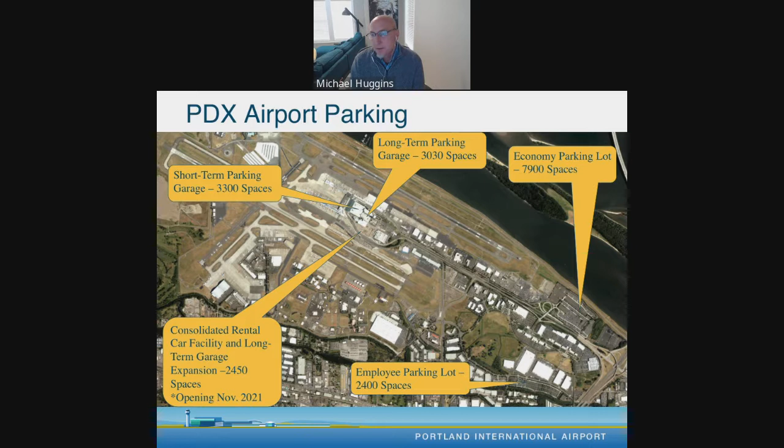So in evaluating electric charging options, we have to really look at our consumers and how they use our facilities. In 2019, we neared 170,000, almost 200,000 transactions in our parking facilities per month. But with COVID, things dropped off significantly. It allows us an opportunity to kind of do some of those capital projects without impacting the customers very much, but you can see that traffic is starting to pick up again with about 50% of our transactions again back in March.

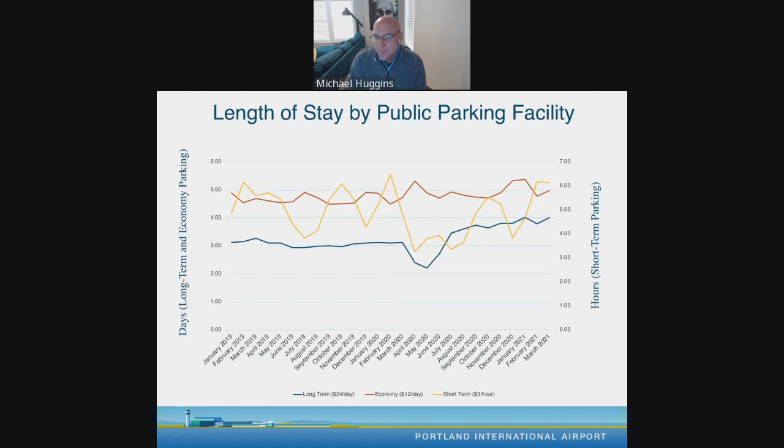Our length of stay is important for us to consider as we look at our electrification options for vehicles. Short-term parking, which is used on the right graph here, our average transactions were between 4 and 6 hours. So we wanted to provide an option that best suited those customers. And our longer-term parking, long-term as well as economy parking, that's basically 3 to 6 days. So for that, a level 1 charging solution was the most economical for us, not only to install and maintain, but since we provide charging for free, it's a relatively inexpensive option in that regard.

We have 70 parking stations throughout our public parking system, including 36 in our economy lot and 34 in our short and long-term garages. And these are level 2 in there, about 50% more efficiency as far as charging vehicles in those closer in parking options.

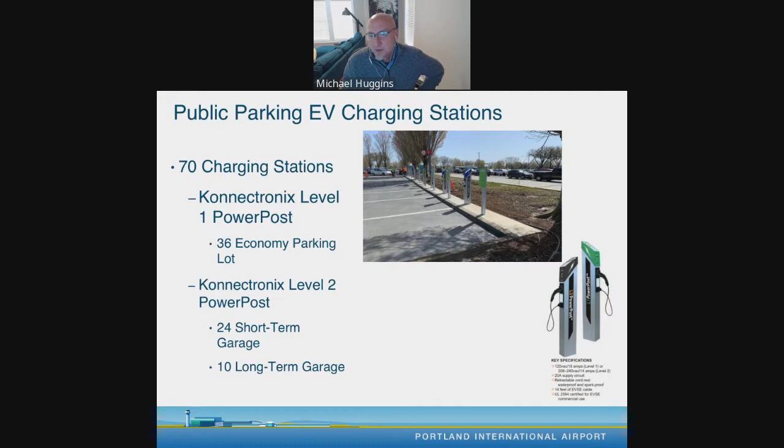In our airport parking, employee parking facility, we just increased the number of charging stations throughout. We had 18 in our remote parking lot for our employees and gone up to 28. So we have 51 charging stations available now throughout the facility. And you can see by the technologies, they're all different levels.

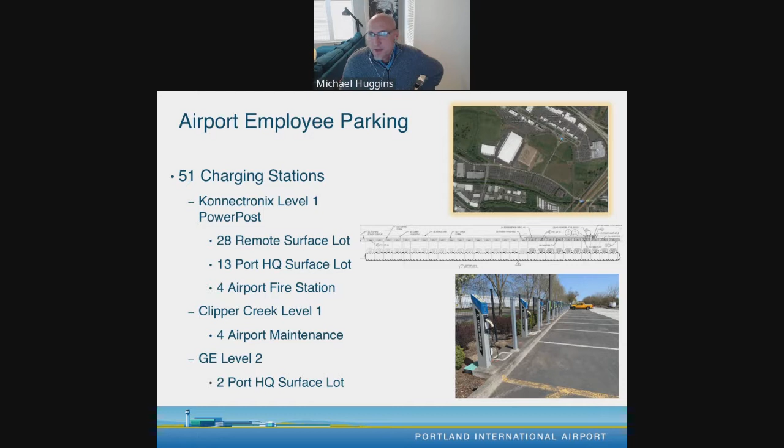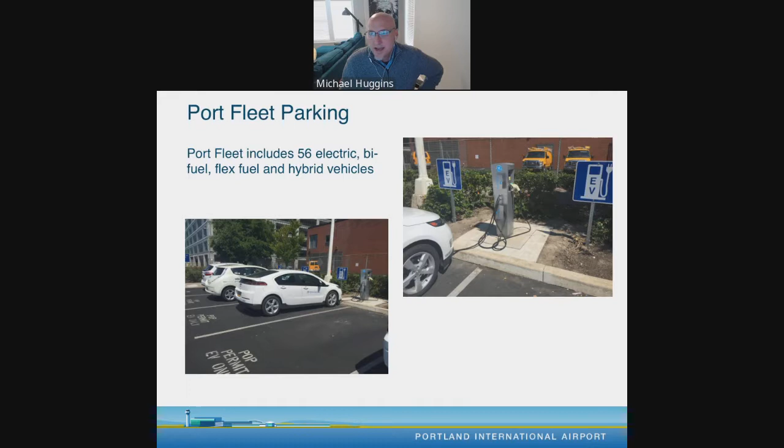Our fleet, as I said earlier, we're committed to alternative fuels, including electric vehicles. We have the General Electric level 2 charging stations for our fleet vehicles. And you can see these vehicles operated not only on our port property, inside and outside of the secured area, but also out in our community. And we have lots of markings on the side with our commitment towards electrification.

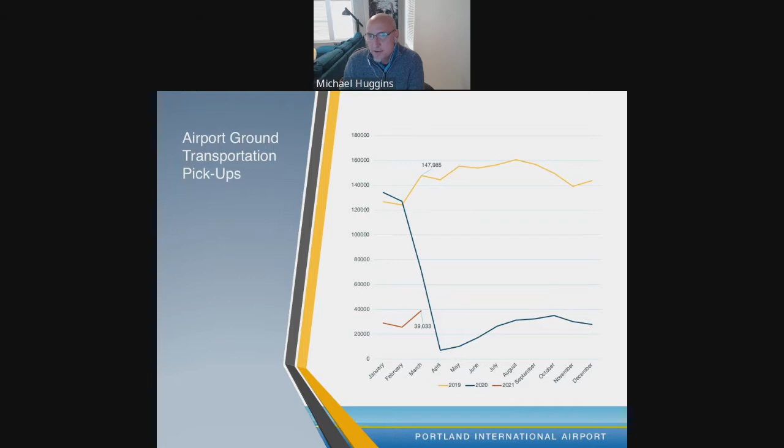On the ground transportation side of things, you can see also the similar trend where COVID really took a hit on our operations at the airport and people coming in and out of the airport. During our peak, we did about 160,000 pickups at the airport, and being a heavy origin and destination airport, you can basically double that number to see the total transactions for ground transportation at the airport. We don't have a lot of transfer traffic like our partners down at Denver, but we do see a lot of people start and end their trips at Portland.

So in evaluating the different modes we provide for them, if you look at the number of taxis and TNCs operating at the airport, it's a significant number of vehicles with low occupancy, taxis as well as TNCs. And TNCs are Ubers and Lyfts, our transportation network companies.

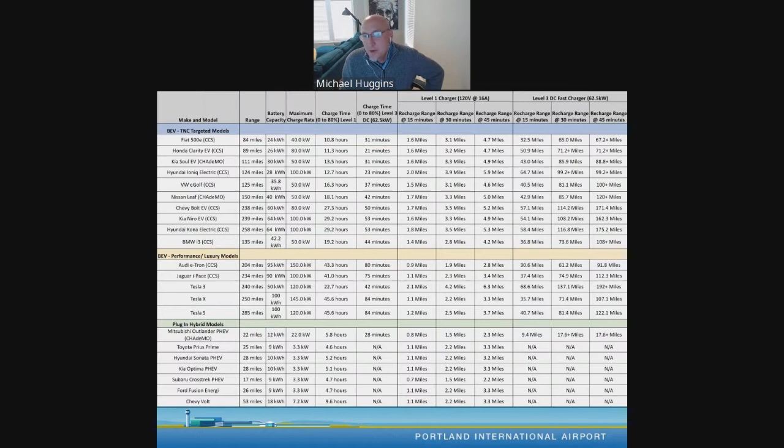So in that, we also evaluated what's the best bang for the buck as far as the charging stations and the availability of charging to get the users, the ground transportation providers, out in the community and back to the airport, because if they're not at the airport, they can't provide transportation to our customers leaving or getting to the airport. So we evaluated the number of cars out on the market, and I'm sorry if not every vehicle is listed on there. This is a couple of years old, but we wanted to make sure we're providing something that people can get out and back.

And so looking at the technology that can provide the highest level of charge in a 15-minute period, which is about our average wait time out there for our TNCs in the hold lot, we selected a DC fast charger solution. We start installation on 5 of these in our hold lot, and that will start at the end of next week. And this we chose because of the high reliability. It minimizes our maintenance costs, and the universal compatibility.

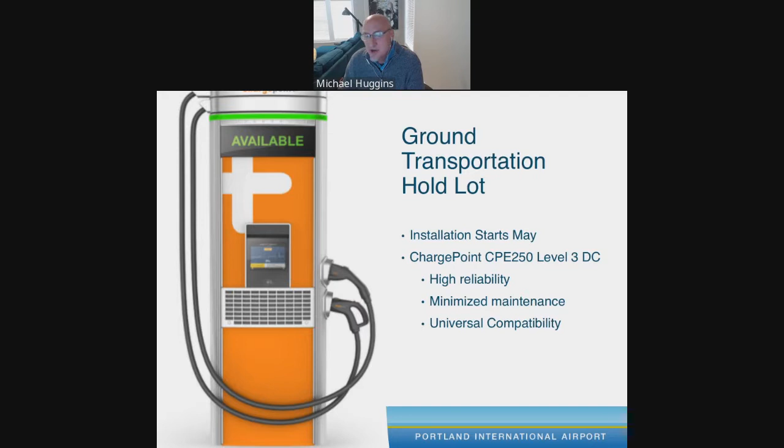So as we partner with Forth to gain access to the secondary TNC market for electric vehicles for our taxis and our TNCs, this provided us the best solution to get those vehicles in sufficiently charged so they can get to the airport and get the customers out of our airport.

So in the future, as we move forward, we want to increase our charging station capacity based on our demand. So we continue to evaluate use in both public and employee parking as well as our ground transportation environment. And as more adopters come on, we have provided enough capability in our systems to expand easily in a linear pattern just down those parking spaces.

For us, the benefits way exceed our downside here. We really value our customer service at our airport, and this gives us an opportunity to kind of push that out in our community, brag about it, and do what we can to provide the best services we can for our airport users, our ground transportation providers, and our public that surround the airport.

And I think I made it in time. So I think we're saving questions to the end, but I appreciate your time.

Great. Thank you so much, Michael. It's really interesting to hear about how COVID, through everything, perhaps provided a little bit of an opportunity in terms of resetting and installing infrastructure.

I have to say my favorite thing about the Portland airport, though, is the dedicated area to bike assembly for those who are traveling with their bicycles. So I was really happy to see that.

Moving on, we have Dr. Kailas from Volvo. Doctor, if you wouldn't mind, if you're able to turn your camera on.

That's fine. Thank you. So, good morning. As Barrett said, I work in the Port of Valencia in national and European projects related to sustainability and energy transition. This presentation is focused on electrification of ports. I'll start with a short overview of the EU regulation, then I'll speak about the environmental challenges of our sector. The third point will be about the project of electrification here, which is the core of the presentation, and I'll conclude with future actions.

So the European Green Deal, as some of you may know, is the strategic plan to mitigate climate change, and its main objective is to achieve climate neutrality in the EU by 2050, including maritime transport. Some initiatives are also being studied, such as including maritime transport in the emissions trading system or applying the carbon tax to the sector. Sorry for skipping some info in the slides, but there's a lot of content. I believe you'll get the presentation afterwards. Anyway, about the vision, the EU should be among the first to achieve net zero greenhouse gas emissions by 2050 and lead the way worldwide. There's also a midterm goal, the reduction of these emissions by 55% in 2030, having 1990 as a reference.

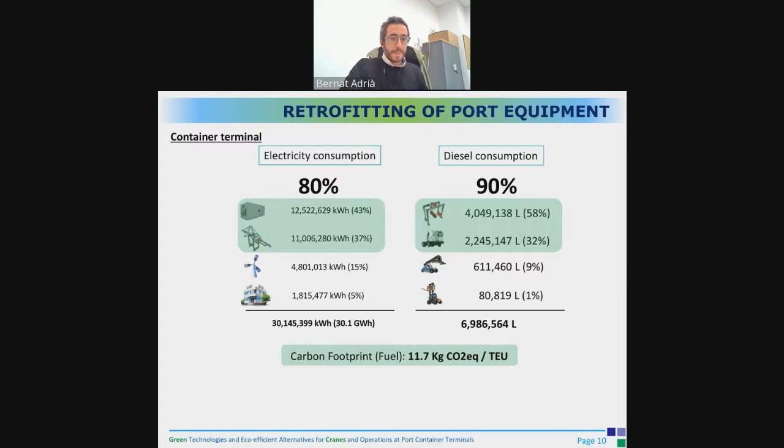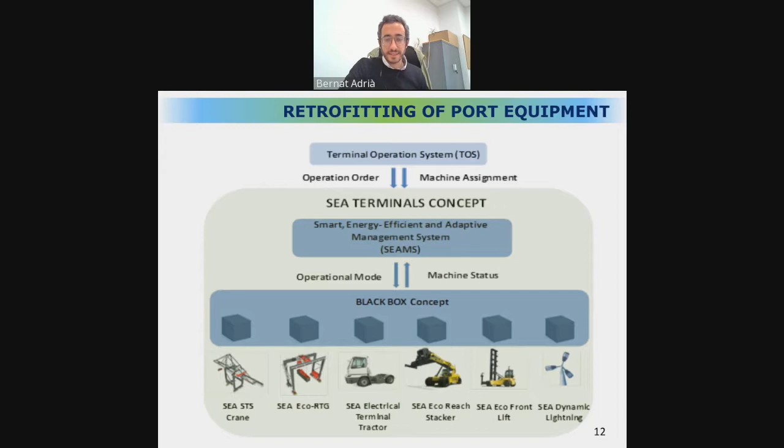Within an innovation project called Sea Terminals, we collaborated with leading manufacturers of different types of equipment, working with alternative fuels, as we can see in the following slide. So you can see here eco versions of RTGs, electrical terminal tractors, also eco versions of reach stackers and front lifts, as well as dynamic lighting in the terminals. In the next slides, some of these examples are shown.

So the Sea Terminal dynamic illumination is based on the efficient use of lighting. At night, many areas of the terminal do not present activity. However, lighting usually is working 100%. This concept presents some movement sensors in a wide range, up to 300 meters. If movement is detected, intensity is increased to 100%. But when the area is quiet, the intensity is reduced to 20 or 25%, or to the decided threshold. Lighting towers were removed and LEDs were put, and then the movement sensors.

So, some numbers here. These are the savings thanks to this concept. The electrical consumption was reduced by 80%. Besides, the payback of the investment for this project is less than 2 years, and the internal rate of return is over 35%.

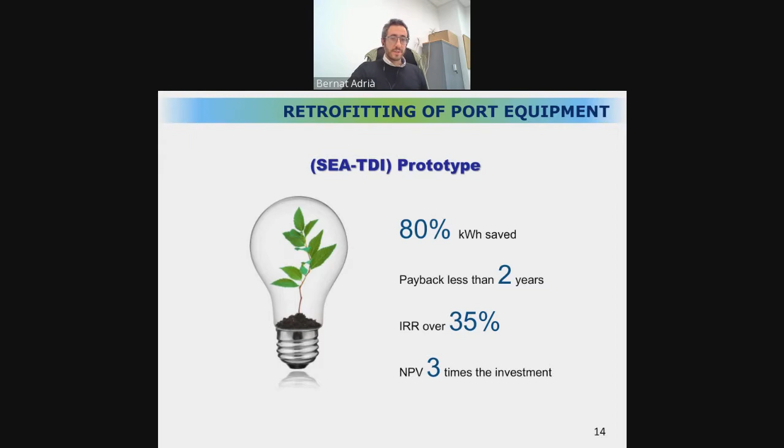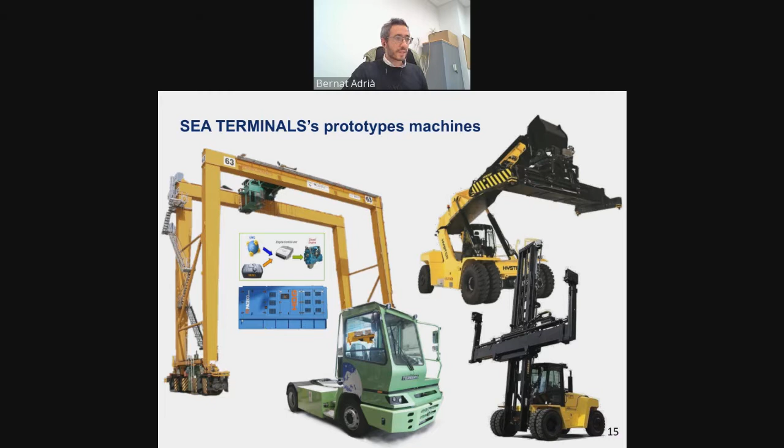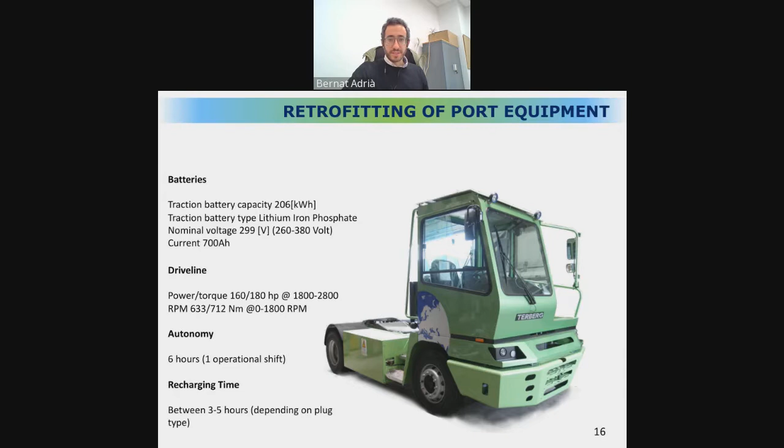We also worked with leading companies such as Terberg, Hyster, and Paceco in the development of eco-friendly versions of this kind of machinery, as well as with an electrical terminal tractor, which is shown in green, and we can also see it in the next slide. So these are some of the characteristics of the electrical terminal tractor: batteries, power, autonomy, and recharging time, which depends on the plug type. I know I'm going fast, sorry for that.

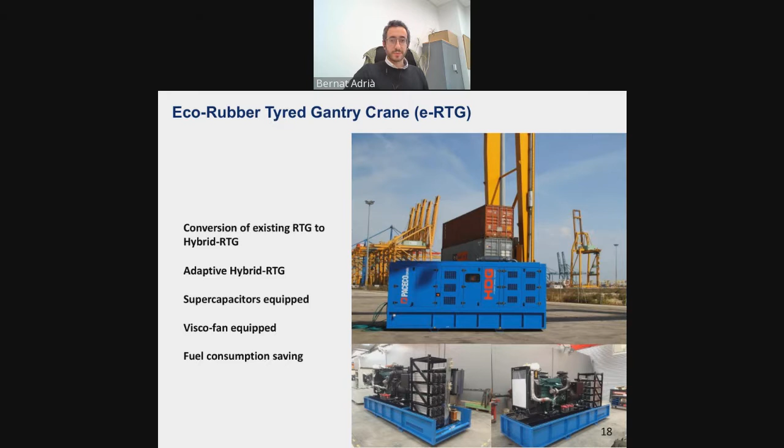So one of the biggest achievements for the Port of Valencia in terms of electrification is that the MSC Terminal Valencia Brownfield Terminal, which is operating almost at 100% of its capacity, decided to electrify every RTG crane on its yard. They own 18 electrified RTGs, which brings savings of 3,500 tons of CO2 every year, as well as reductions in noise and particulate matter. This was the first terminal to do this in the whole of Europe.

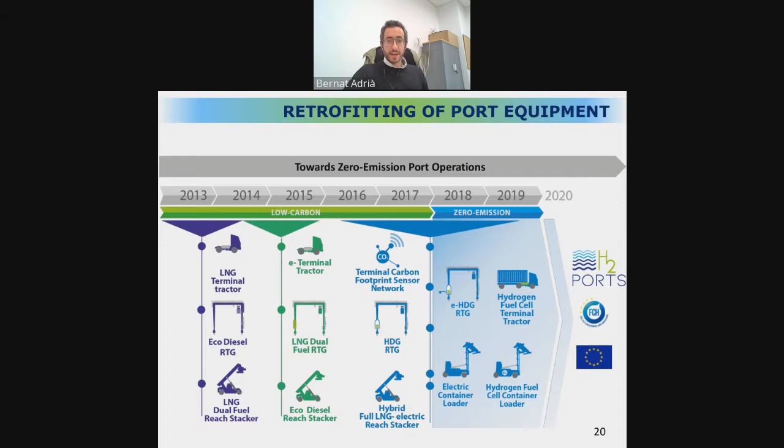It's been a long path of collaboration among terminal equipment manufacturers in order to find the best low carbon options. And so we got to the point in which we are developing the first application of hydrogen technologies in port handling equipment in Europe. A hydrogen reach stacker is being developed to be tested in MSC Terminal Valencia, and a hydrogen yard tractor to be tested in Valencia Terminal Europa. And in order to provide energy to this equipment, a mobile hydrogen refueling station is also being used.

So EALING is a project, a large European project coordinated by us, by Fundación Valenciaport, focused on cold ironing or onshore power supply. EALING objectives are to create a harmonized and interoperable regulatory framework in order to facilitate onshore power supply implementation in European ports, to ensure vessel compatibility with the ports of the consortium, and to lead the necessary financial, legal, technical, and environmental studies to accelerate cold ironing and electric infrastructures and equipment in ports.

So the consortium consists of 12 port authorities, 3 public institutions which handle every port of a country, such as the Bulgarian Ports Infrastructure Company and the Marine Institute of Ireland, and 7 technical and consulting companies, including us.

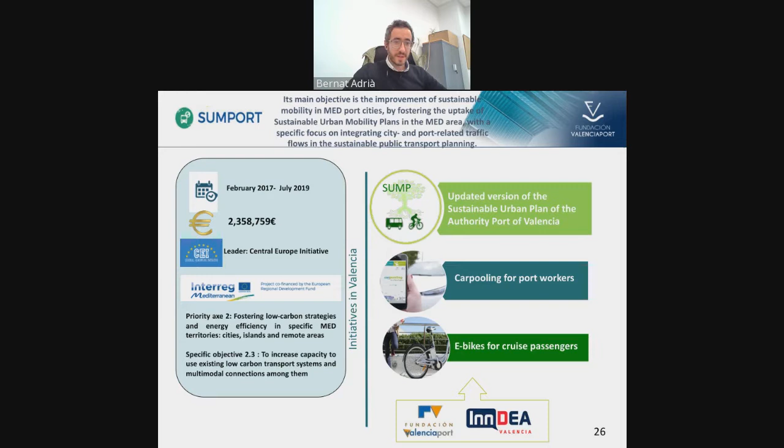We also promote safe and clean mobility, collaborating in different projects of integration of the port with the city. They may not be in the core business, but it is also important to mention this. For example, SUMPORT project, including the implementation of electric bikes for cruise passengers, among other actions.

Sorry, 1 second. Yes, you will have access to this presentation. You can check afterwards as well.

So looking at the future, we are defining the actions to develop in terminals, road transport, shipping, and in all the different working groups. And electrification is key within all these action plans. For instance, in terminals, one of the terminals, MSCTV, has been already electrified, as I explained, but there are 2 more container terminals that need to electrify their yards. In the case of road transport, there are several options. One of them, for example, could be the use of electric or hybrid trucks.

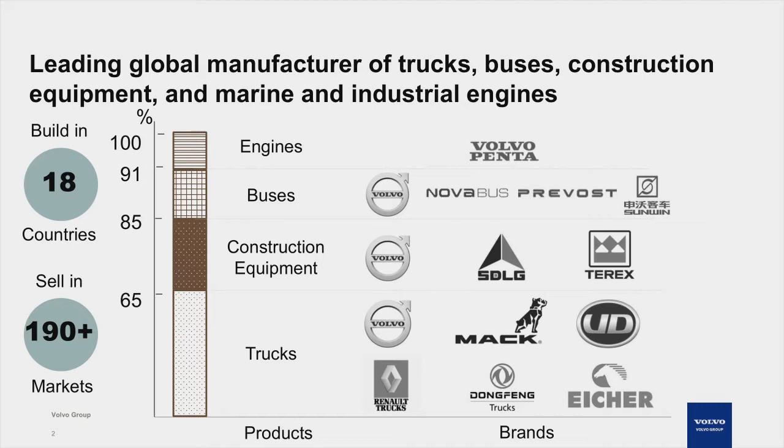And the buses for the U.S. market here in North America. Next slide, please.

Thank you. So sustainability is one of the core principles of the Volvo Group. It is very close to heart. We are committed to the ambitions and climate change goals of the Paris Agreement from a life cycle perspective. The majority of the emissions occur during the use phase of our product. One of our priorities really is to develop solutions that reduce carbon emissions from transportation and machinery. We believe in supplying energy efficient products and solutions to enhance the productivity of our customers.

So we actually even made a recent announcement last year saying that our ambition is to sell 100% fossil-free Volvo Group products from 2040, and to be carbon dioxide neutral by 2050. We're following science-based initiatives, targets, so to speak, to come up with these estimates in terms of where we want to go. So that is really our North Star.